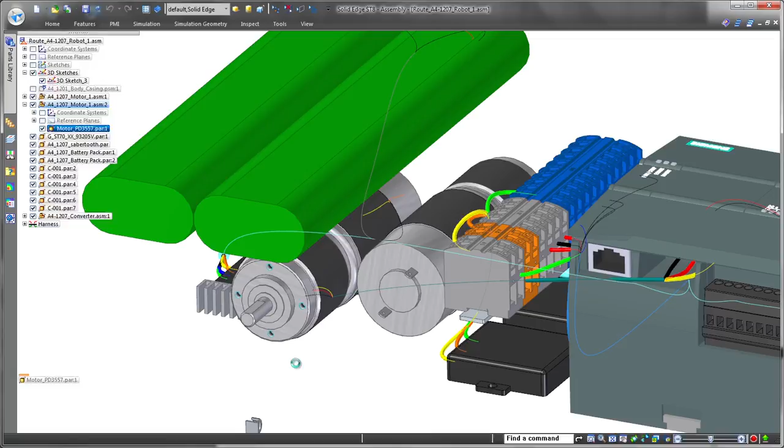In this demonstration, we'll continue to work with a new prototype of our recovery robot, routing electrical wires in bundles using previously imported wiring schematics within the current layout of all the physical components. We'll also complete a nail board for the resulting harness.

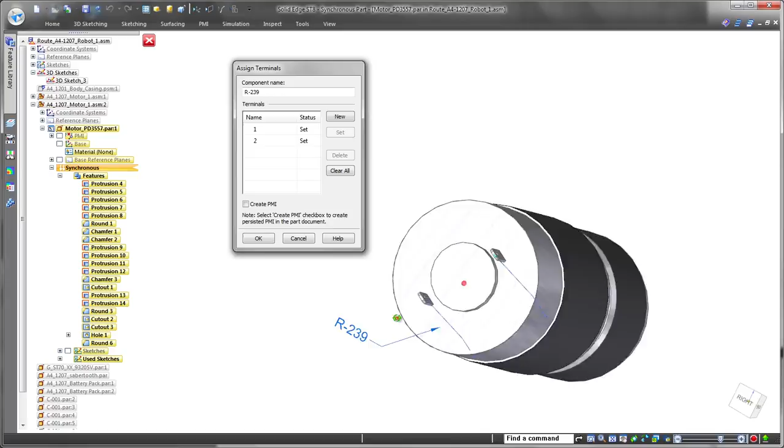Now that we imported the wires and started to create physical harnesses out of them, we'll route the electrical wires on one side of the robot. We're using new motors on this prototype, so we have to define them as electrical components and assign terminals.

New to ST8, all definitions and terminals can be created as product manufacturing information, PMI. These part-level annotations are now read and used by wire creation and routing functions, a huge benefit.

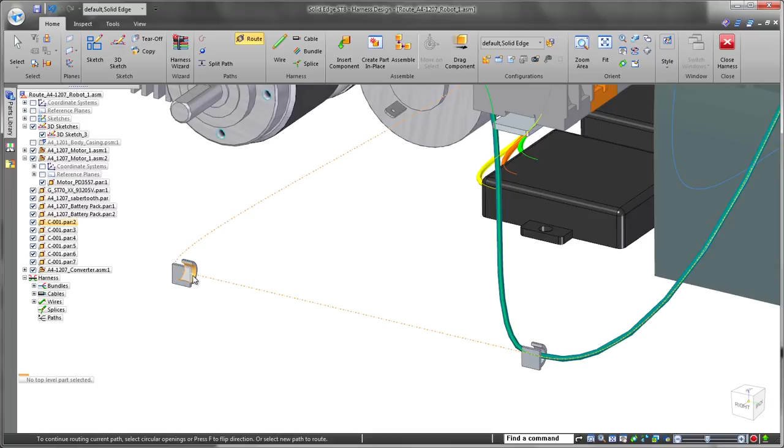Solid Edge ST8 provides the ability to automatically route wires and cables through existing clips, saving time and effort. In fact, wires can be associated with any circular faces, even partial rounds.

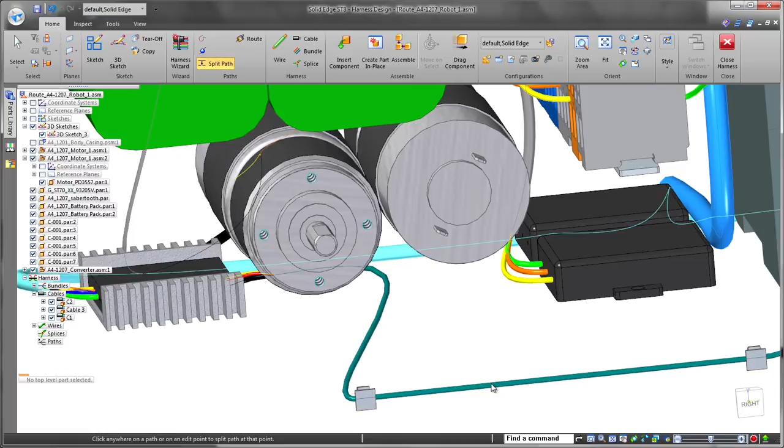ST8 introduces the ability to reuse existing paths, and here we'll bundle other wires using the path of the longest cable. We now have the ability to split a path at any location along the curve. We'll define a split across from our motor terminals and another on the control point on the edge of the clip, ensuring proper flow into the motor.

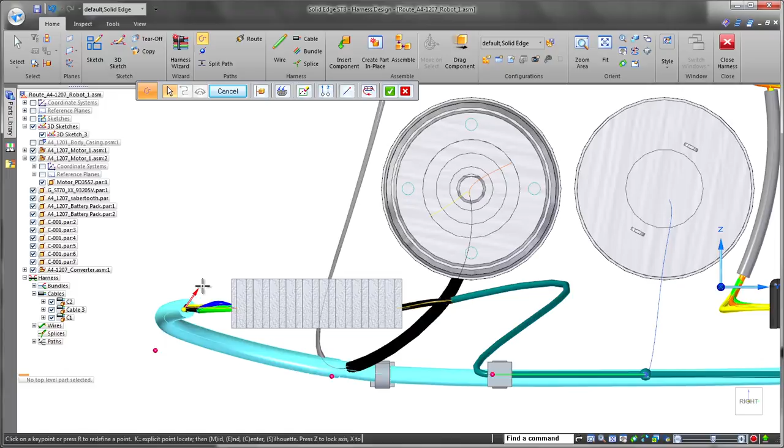Routing paths as 3D sketch curves provide maximum design flexibility in a fraction of the time, as both control points and blue dots can be moved to modify the path shape. A split can serve as a beginning point of a bundle containing several runs to create the desired connectivity.

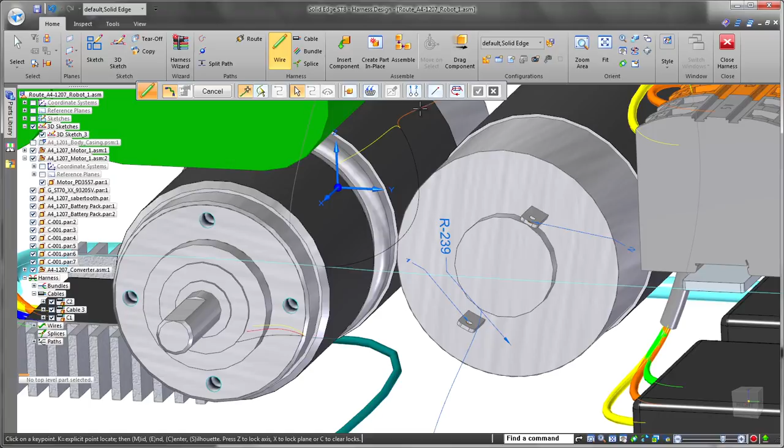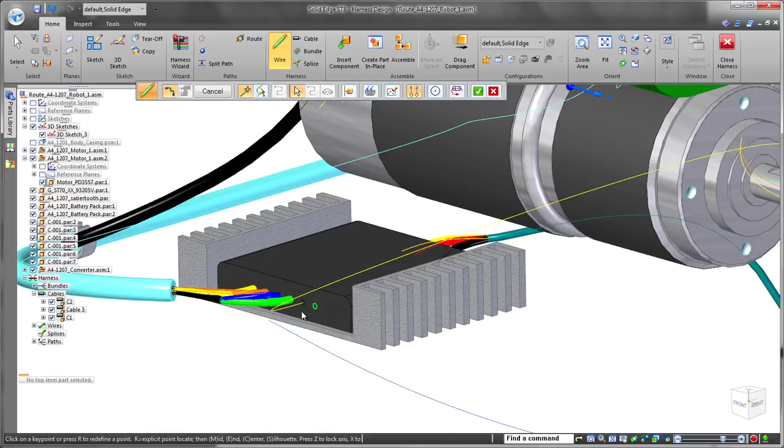Now that the paths have been routed, we'll place wires. Solid Edge ST8 provides handy filters which narrow down key point selection by identifying terminals defined with PMI. Direction of wires is important, and Solid Edge ensures we get the correct input and output direction the first time, though changes are always easy and fast.

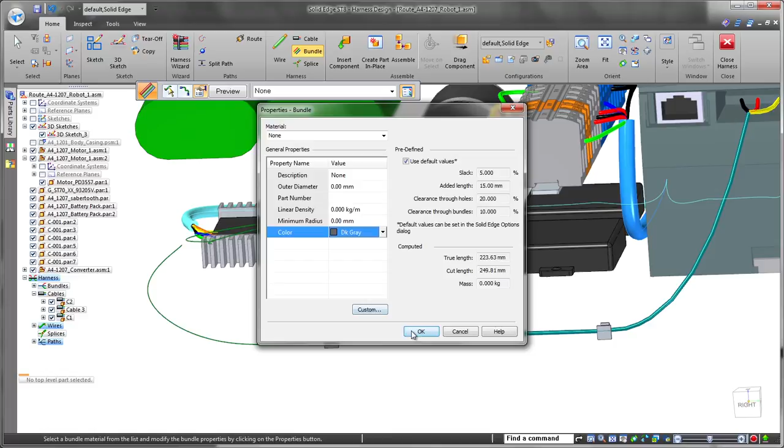Next, we'll bundle these wires to create an orderly set. Each bundle is defined by the collection of wires, including those coming from a split, and color to differentiate bundles by function or some other criteria. Solid Edge calculates the diameter of the cables and bundles based off of quantity and size of the associated wires.

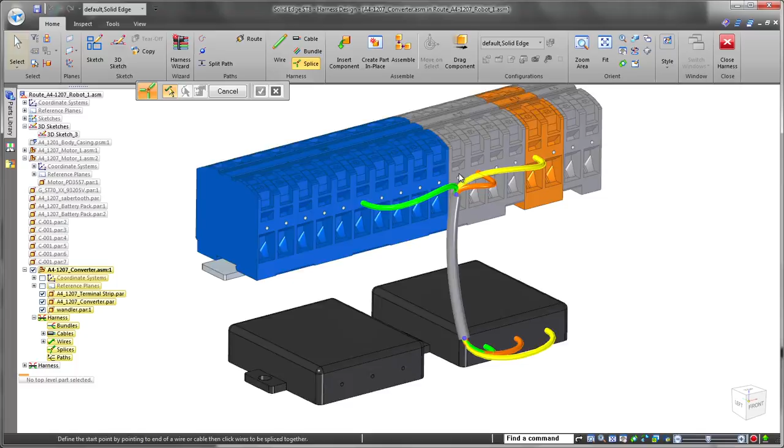You may need to move a bundle to avoid interference or to lessen the impacts of heat or vibration. Solid Edge handles changes seamlessly. Finally, we need to connect our second converter component. To accomplish this, we'll use ST8's new splice functionality to connect new wires, or in this case an entire cable, into the existing cable. Note the sphere representing the splice feature. We'll quickly route new wires from the converter's terminals to the splice feature.

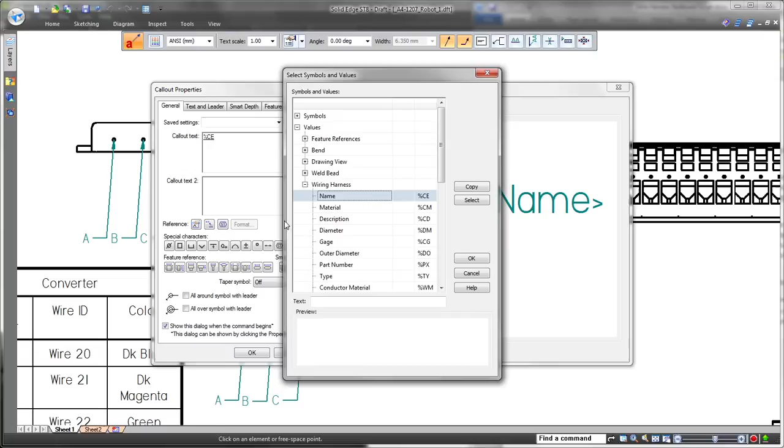Documentation of the harness's cables and bundles leverages Solid Edge's industry-leading drafting functionality. Here we'll finalize our electrical design by updating a nail board drawing. Solid Edge provides true nail board representations for layouts and connector tables. ST8 introduces splice representations on the nail boards. Watch as we place a callout to show the definition of the bundle and its corresponding splice.

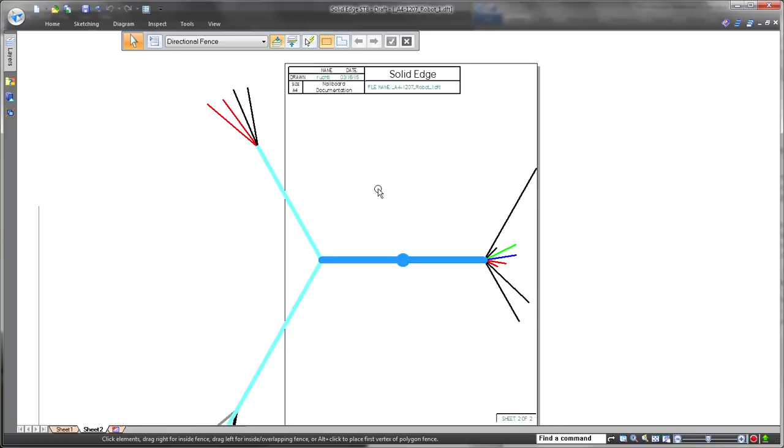Traditional nail board design requires a 1:1 scale so the actual harness can be assembled on top of the nail board. ST8 provides nail board scalability to meet the need for representation on a standard drawing size. Watch as we create an A4 sheet and scale down the nail board to fit. We'll place the conductor table on additional sheets to complete documentation of the overall system.

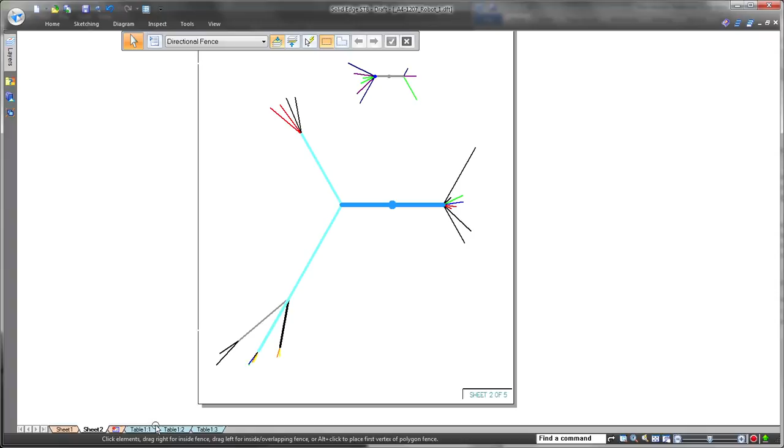These enhancements facilitate electrical system design for both manufacturing and documentation. Just one more way that Solid Edge accelerates product development and ensures you get the job done right the first time. Solid Edge. Design better.